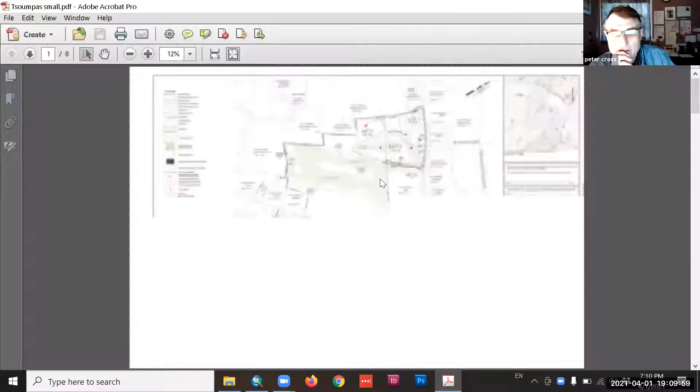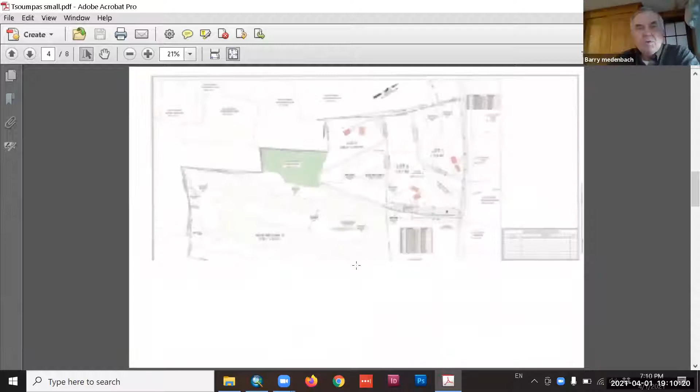Right. Okay. One more down, I think it was one up or down that was better. No, I guess it's up then. Okay, go up one more. I think it's sheet 2. Yeah, okay, that's not the one I'm looking at. Go one more sheet. Yeah, there's another sheet. Keep jumping over it, go back. There you go. Zoom in on that. Okay.

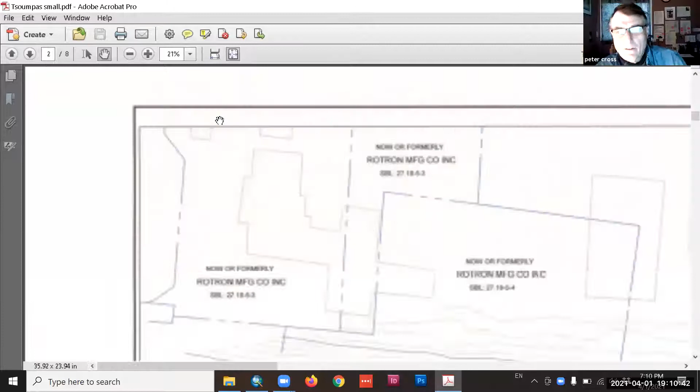I'm going to zoom out a bit so we can get a look at lot 1 and 2. Getting close, okay, getting close.

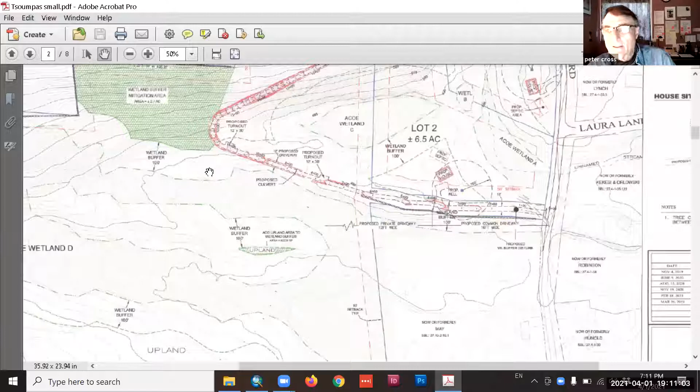So tonight's mission is that the planning board has to agree on the mitigation measure that we will apply to the site plan. The applicant has shown, off to the left, the green area, which was their idea of their mitigation plan, along the side of the steep slopes there.

What I'm suggesting is, if you look between lot 1 and lot 2, through lot 1 there's an intermittent stream that comes through. And if you look right where it says lot 2, plus or minus 6.5 acres, that area is between the two buffers. There's an area between those two buffers that also adjoins the stream, which is shown as a dotted black line.

What I'm proposing to the board is that since we have 2 lots with a stream and wetlands, I think we should give more buffer in that area, because that's more likely to get disturbed. I understand the applicant picked the other area, but I just don't think that area would ever really be disturbed.

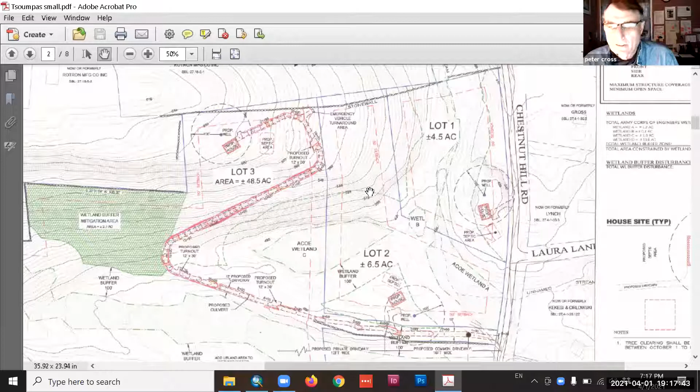It's a little hard to see what the stream is. Is this it? The stream's dotted, it's a dotted black line. Yeah, it kind of makes a loop. No, it's near that loop, but if you go to the top of the page you'll see where it says stream - it comes down a little further. Oh, I see it moving now. Okay, there it is. Now keep going, there you go, now make a turn toward the road.

So I'm thinking if we could protect that area more, because that's what the proposed wetlands and buffer is for. Except I don't think it needs protecting over there as much.

You mean on this side? It's sloped enough that it's really not going to need it. Well, but as Barry said, it would take both sides to get to the acreage, to get to the area needed. So you'd have to do it on both sides.

I mean, us adding buffer doesn't have to be exactly all in the same place, you can break it up. And what Barry's suggesting, I think, is good - to get it between Chestnut Hill and the existing wetland, and then on the house side.

Now is here, right? So what is the house site? Because the stream is right behind it. Right, and that dotted green line is the buffer.

So you've got some land here you could put a barn or something on. And that's about all there is, right? Or is this buffer here? That's out of the buffer, and I'm suggesting we create a buffer in there.

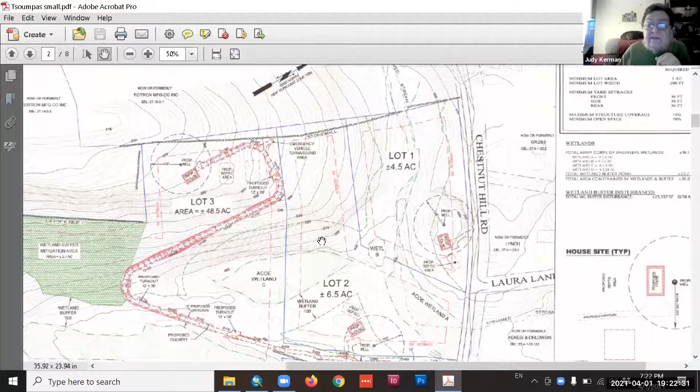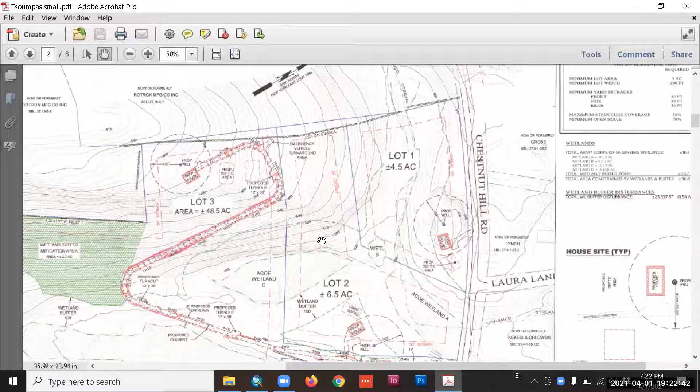Peter, can I ask one other question? In your view, would that be as much protection as we could reasonably add on? Well, the code says to at least match the square footage that's being disturbed, and that's what we're doing. And you have to keep in mind that the applicant has agreed to basically protect half, or almost more than half, of the entire property from further development.

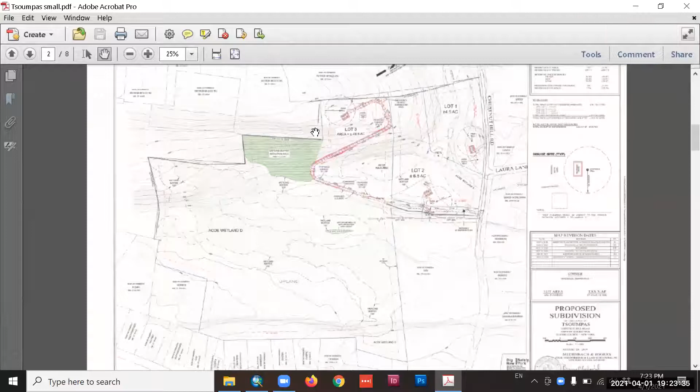So, like I said, this application is in two stages. We've already come to the conclusion that we're not going to develop the whole lower half, and that was a major concession by the applicant and a major good thing for the environment. All this stuff down here, isn't it? Right, all that's going to be left undeveloped forever.

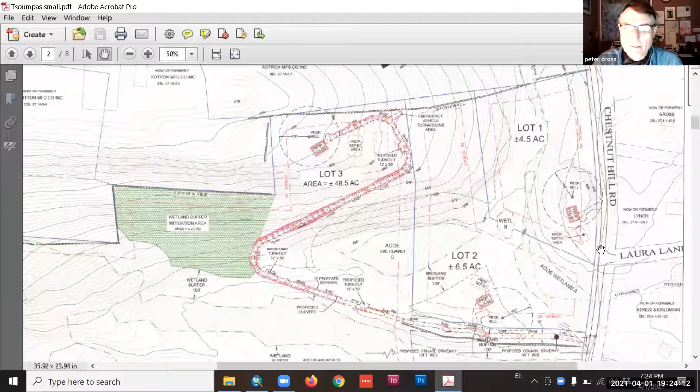So I think the idea of this, this is basically a special use permit, and the idea of doing this is to protect the environment, but also to come to an agreement with the applicant, because we're not saying no, we're saying can we do this? That's the way these things get worked out, a back and forth agreement so everybody can get the best possible results.

So I think that if Barry says there's a half-acre disturbance, remember this disturbance is actually on an existing road, so it's not really heavy disturbance. Yes, they have to put a proper road surface, but it's already a raised roadway.

So it's less disturbance than if you were actually going to put a roadway through a buffer that didn't have a road on it. I know we discussed adding vegetation, I know Matt was talking about adding vegetation on either side of the road, but Barry's point is true that you just make more of a mess on either side of that road trying to do that. So when they develop that road, if they do it as carefully as possible, then our best result is to get more protected area between the three houses. I think that's the best result we could ask for.

So basically, we would agree to that. We would vote to accept this plan as a mitigation plan, and then Melissa can put that in the final resolution. It'll be pending Barry's final map showing that. We'd have to approve them, it'd be subject to his submitting a map that's acceptable to the board. Subject to that, but I'd like to get this part closed tonight so that we can agree that this is the mitigation and we've fulfilled the wetlands and watercourse permit process.

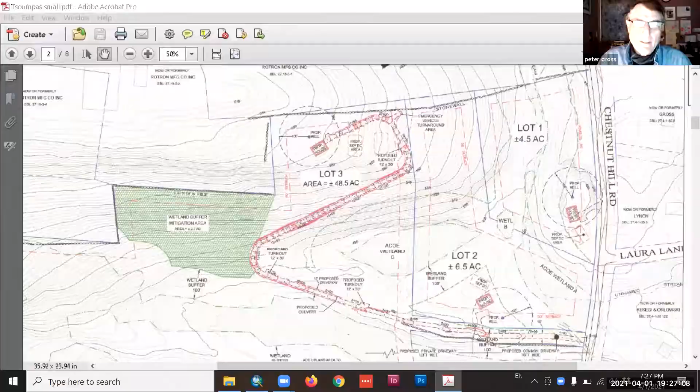And I believe we have language that says that the rest of that land will not be developed. And I believe that's also to be in the final version of the map. Right, so what's proposed now is all that can be done on that property.

So, Barry, do you have any other questions or things that you need to address? No, I just want to point out we haven't had a public hearing yet. No, we've got to schedule that, now that we've taken care of the wetland issue. So now Melissa can schedule a public hearing for final approvals.

Unless anybody on the board has any other things they think we haven't addressed. I just want to express my appreciation to Michael Tsoumpas for working with us on this and leaving so much of that land undisturbed. I think that's a very good outcome.

Yes, I definitely agree. Peter, I have a question - this is Stuart. Is a public hearing required on a wetland watercourse permit application, or only on the subdivision? So there's no... Both hearings are required? Both, we're doing them both, at the same time. Yes.

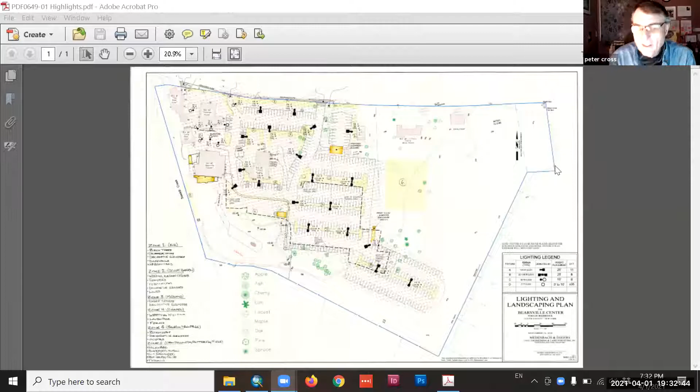Okay, so Barry, why don't you explain - whoops, it disappeared - why don't you explain what's going on here? Well, the applicant actually provided this. I'm looking at it really just like you guys are, and I'm wondering if Kim or Lizzie wants to talk about the reason they added - they're basically adding trees. Hi, the different zones.

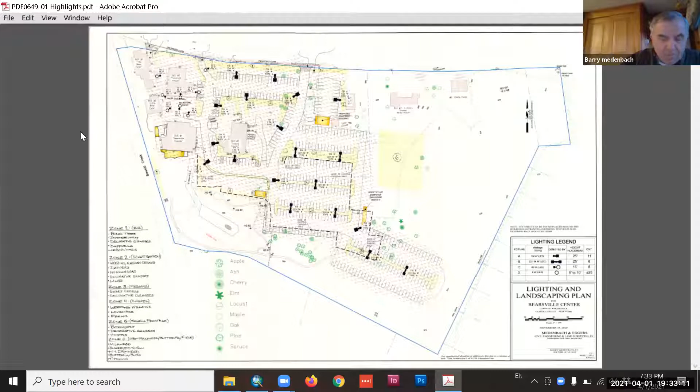Okay, well just a second before you do that, Liz - let me cover a couple points regarding this. One is the grave site for Albert and the right-of-way, which you have shown on the map, which is going to be protected and honored, correct? Absolutely, yes. The other issue was drainage, stormwater drainage from the parking lots.

Engineering wise, that water is going into dry wells, I assume. Yeah, we're going to have some recharge basins. When you get just beyond the new parking lot area, there's some depressions in the ground, probably from old stream washouts, where the water is quite gravelly and coarse, and we're probably going to recharge a lot of it back in there.

We still have to put that formal plan together because our disturbance is over an acre. We have to do this in accordance with the state stormwater regulations and prepare a full stormwater pollution prevention plan. We've looked at that, we have kind of a concept as to how we're going to do it, but haven't produced the formal plan yet. I really wanted feedback from the planning board on how we're laying out the parking lot, the number of spaces, and other features before we did all those calculations, because they're quite tedious, and if we start moving things around I'd have to do them over.

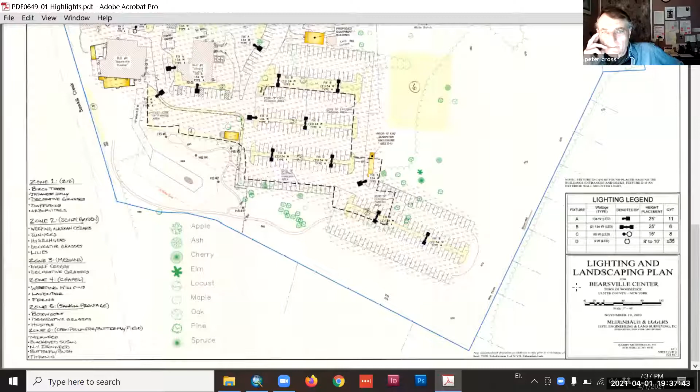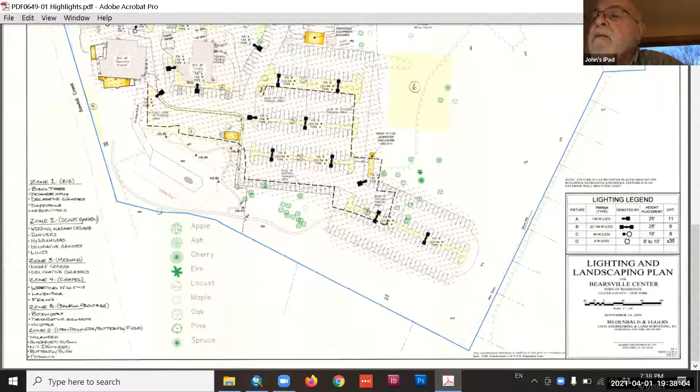Yeah, are there any elevations on here? Not on this sheet, but the other sheets there are. Would you like to see them, John? I think Barry's got some sheets that would show that. Have to figure out how to get them.

If you go to sheet 1, that shows the parking lot. But this plan here was really to illustrate the plantings they want to put in.

If you go to sheet 1, I've got to figure out what I did wrong with this control. Let me see if I can get my controls back here. Can I just say that it's highest in the top left corner and lowest in the bottom right corner?

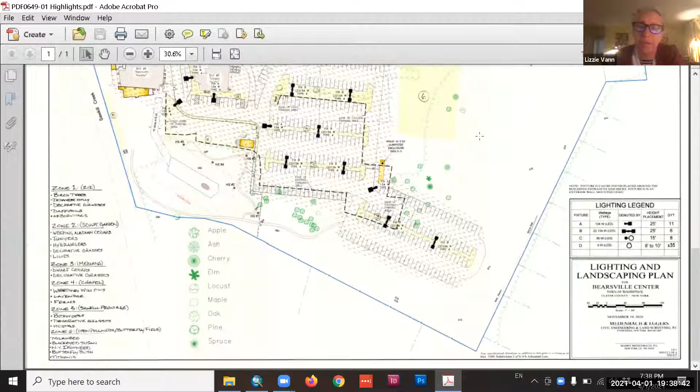The difference in height is about 25 feet from one end of the lot to the other. So we've had a lot of runoff coming off the mountains, coming off the road, hitting the buildings in the top left, and then washing down. We've trenched around every building and tried to trench in front of the Peterson house to control this water.

We actually have a proper elevation map that looks at every 6 inches, but you don't have it, so I'd have to dig that out. They have, but Lizzie, they have.

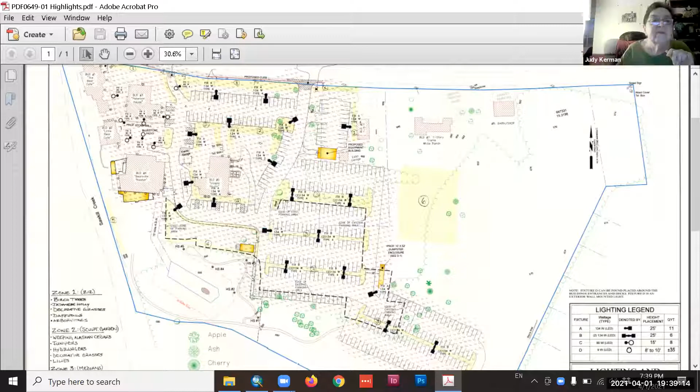If they go to sheet 1, it shows contours. Okay, I'm going to have to do something different here because this is showing me that there's just one page in that. So that was the most recent submission. You have to go back to the prior submission. This was just added as a landscape plan. We had submitted the maps earlier.

Do you know what the name of that document is? Melissa, do you know what the name of the document is? No. Well, maybe I have it and I can do a screen share, but somebody needs to help me do it. Get out of the way here. Okay, thanks Lizzie, you're the best.

We're trying. Okay, so at the bottom of the screen, yeah, it says share screen, and you got it, girlfriend. Right, okay, so that's sheet 1. I would say, blow that up a little if you can. So then up at the top of the screen, you can see a zoom button. You want to make that higher. We can do that for ourselves too. View options, okay, all righty.

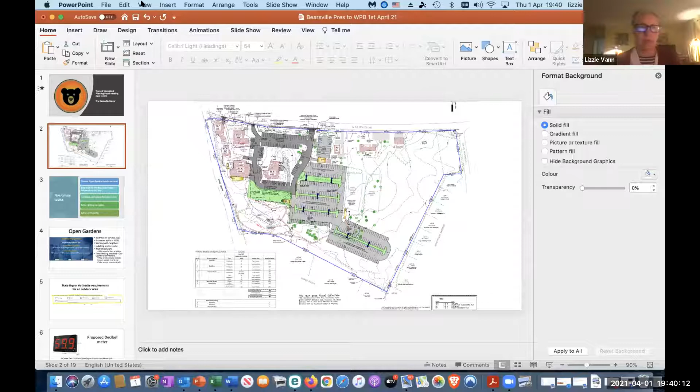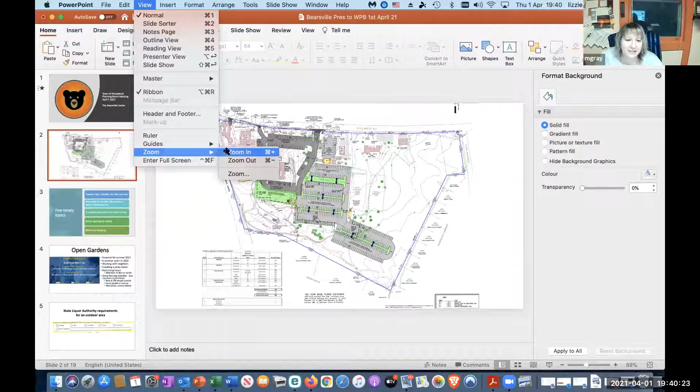Let's try this, zooming in. Okay, oops. Oh God, okay, you're doing fine. You're doing great. It doesn't want to get any bigger. I'm really sorry. Oh, there we go. There, yeah, you're doing it. Okay, now you can see those circular, semicircular contours coming left to right and top to bottom.

All right John, does that help? Down toward the stream? Yeah, everything flows down towards the stream. It flows from the top left corner to the bottom right corner. Well, actually the Sawkill Creek is on the left. Yeah it is, but it's still lower as you go down off the site there. Yes.

Okay, board members, questions about the plan? Now the parking lots are gravel? The dark gray is blacktop and the light gray is gravel.

Okay, and we're going to take some existing parking lot out. If I could talk you through the plan a little bit. Sure. So just looking at the image that's there now, if you go over to the Utopia building, which is the one whole building you see there with the parking all around it, that's going to be paved all the way around. The lower end of that big green area, that's actually gravel parking now, and we're going to turn that into a lawn area, so they have a nicer outside lawn area that's closer to the buildings.

And we're adding some additional parking up. If you look at the main entrance, could you slide up the sheet a little bit to the highway? Okay, yeah, over and then just up. Yeah, there you go, right there.

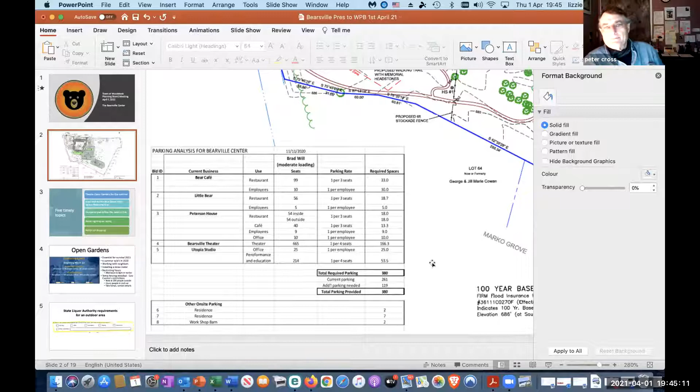So does any member of the board have questions regarding the parking in general? I don't know if you normally put handicap spaces on those charts. I know you've got them. Yeah, we do, yes we have, and they're right at the top near the buildings. I just wonder if they should be on the chart. I think we state at the very bottom of the chart how much we need. But I think they are, Judy.

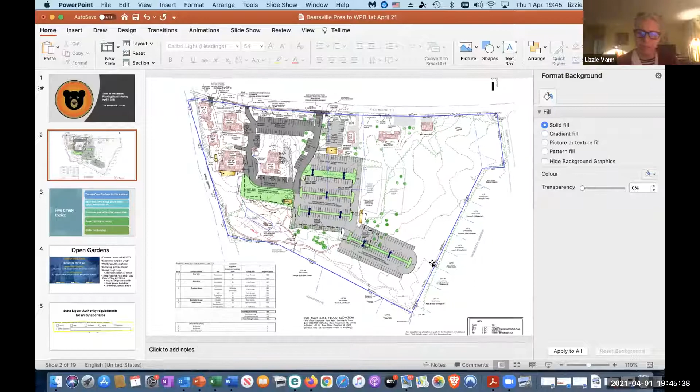I'm just zeroing in on it. Okay, you see the areas with the dots just here? There's a total of 16 ADA spaces required based on the total number of spaces. You see the areas with the shading next to them? Oh yeah, I know exactly what I'm looking at. That's basically van parking. If you can get the locals to keep from going in the shaded areas.

Well, we will put up signs and we will police it. Which brings up another point, Barry, do you have a sheet of all your signage that you're going to have? There is a sheet, I might have to pass back to Melissa or Judy, because there is sheet 3 on the site plan review submission, it has the signage on it.

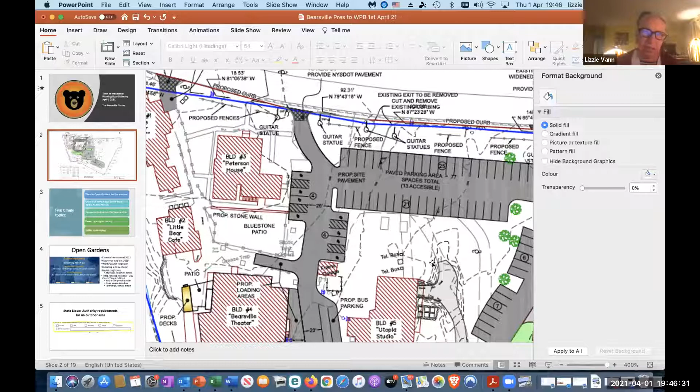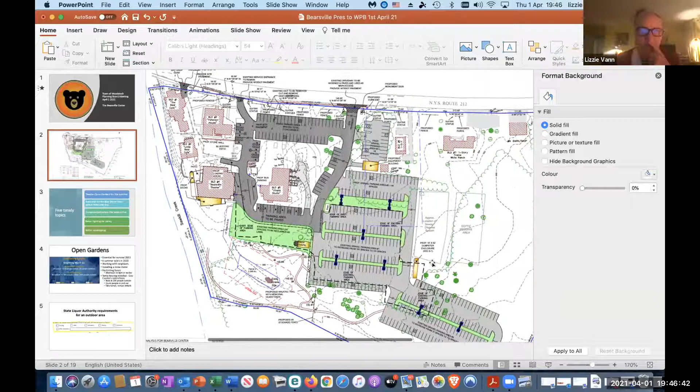Okay, because in the resolution we need to know all the signage. Well, this is a sketch plan, isn't it? Yes, I think that's what it's called. So you're basically ahead of the game as far as what you already got. I'm just going to try and open it, excuse me a minute.

Yeah, if you could get sheet 3 up there, it does show all the signage. So you have one way signs, whatever signs are going to be on the site, and of course the sign on the road for your place has to meet the town sign specs. I'm really sorry, I have to find an email from my colleague.

She sent it to me today, I'm just doing that now. Oh my goodness, are you seeing my screen? I've got all sorts of... okay. Quotes, weddings, oh Lord. Tavern.

Oh here we go, site plan. Right, okay, so I'm going to open this up and go to sheet 3, I think it is, Barry. Okay, yes, there. So can you see that, or do I need to do that little thing again? Can you see it? Okay, it has your main signs, but I mean, signs that say one way, or are you going to have directional signs for parking?

We don't show that yet, but we can. The board wants us to detail that. We certainly can. We generally like to have a map of all the signs that are going to be there. So it's a traffic control sign? Right, exactly, yeah, we can do that.

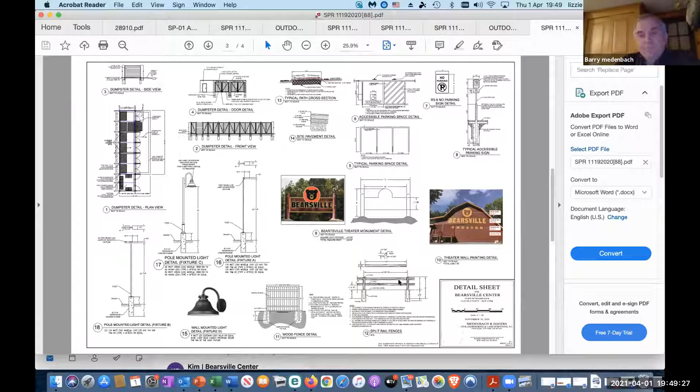Now, you mentioned stormwater coming down the hills and something about ditches, and I'm wondering, Barry, whether rain gardens are going to do the job for you. Yeah, we're going to size them for that. Probably some, not so much just rain gardens, but water quality basins, like a big basin area that can handle a lot of water before it soaks into the ground.

But what Liz did is she put a lot of sub drainage in around the buildings, around the footings, and they picked up all of the leaders from the roofs and piped it all the way down to the back of the site. That was a major improvement over what was there, because prior to that there was nothing. Water would come right off of the highway, off of the buildings, and just lay there around the buildings and create big mud holes.

So she's got a pretty good handle on the improvements she made over the past year around all the buildings. We spent $250,000 on something I never heard of before called mold remediation, because the water went in the basement and everything was a terrible mess. That will no longer happen, the mold will no longer appear. So what I'll be doing is taking it the next step and handle all the drainage from the whole parking area, and show that it complies with today's standards for stormwater pollution prevention.

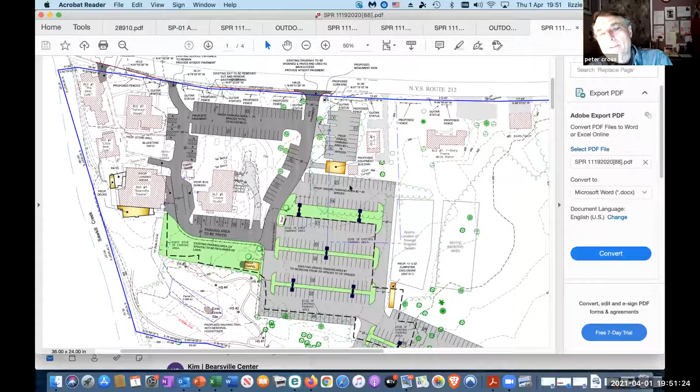Okay, and the other thing we need is either cut sheets for all your lighting, which of course has to be dark sky compliant. Yeah, we did that already. Do you have lighting for the parking areas? Yes, you can see them right on this sheet. Well, there you go, there's the photometrics. We did a total photometric plan for the whole parking lot and even around the buildings.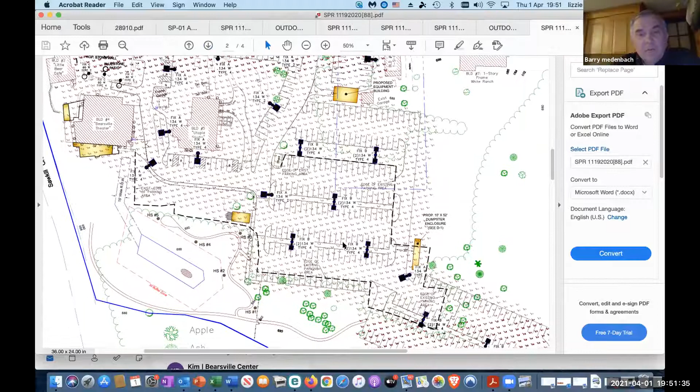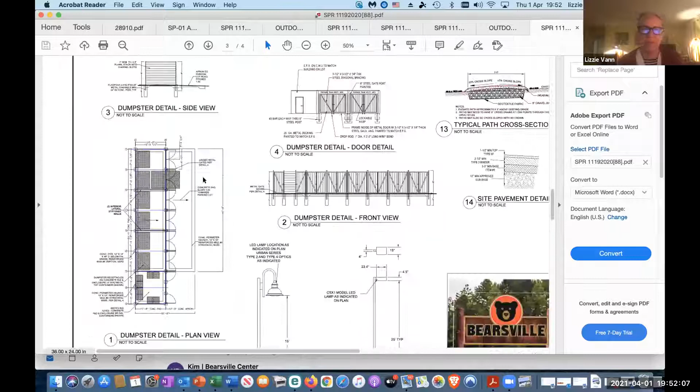And there's a nice detail, so all the old lighting is going to get pulled out and it's going to get all new lighting. If you go to that detail sheet we had up before, you can see there's the lamp fixture right there, that one's on the building. The higher flat ones will be in the parking area, and the ones with the gooseneck are closer around the buildings. So hang on, I'll make it a bit bigger. And the photometrics, well, here we go.

So they won't spread out onto the highway, correct? No, you can see that right on the plan. That's why we do the photometrics, to show we're not spreading any light off site. Okay.

Board members, other questions regarding site plan?

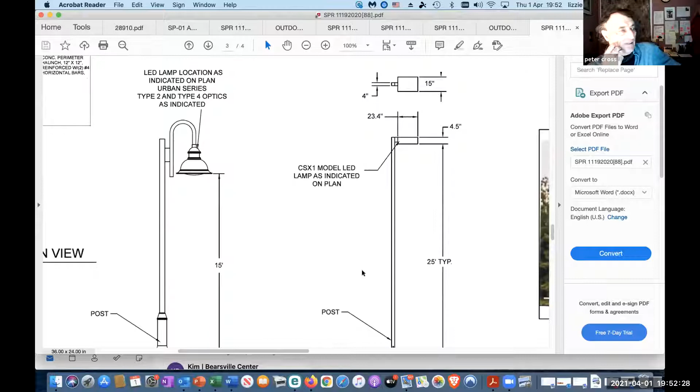Color me impressed. Now, one thing we need is a couple of volunteers to do a site visit. And according to the new law, we can have as many as you want go. Really? Well, it's not a new law, it's the old law, I just never read that you can have over a quorum actually go. But we will need a couple for the site visit.

We'd love to have you. We'd love to show you. We can show you the theatre as well if you'd like to come inside. Peter, I'll volunteer.

I'll volunteer too. Get one from me, one for John. Brian will volunteer too, Brian will go. Okay, I'll go because it's down the bottom of my hill, in fact I was there yesterday. I don't know if I want to walk around outside the car, that's a little too difficult. Well, you can drive around that lot. I definitely can drive around the property, so I might just come and drive around.

So John, or anybody, think of something that we haven't addressed that we need to address for a site plan?

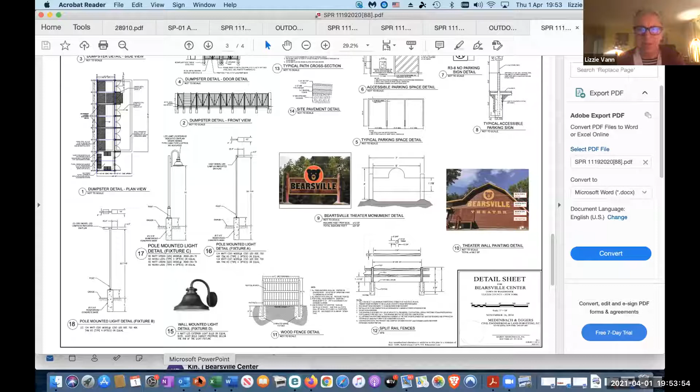Could I raise something, please? I don't know if this is the right time, so you can tell me to go away. But there are a few issues that we would like to raise with you earlier now in the process, because it's spring. I have a little presentation, hang on, I have to put it on the slideshow. Can you see that? Yep, yeah, okay. So that's the site plan.

There are 5 areas that we have some issues with, and they're to do with the timing. Forgive me if I get this wrong. One is that we would like to have the gardens behind the theatre open to the public for the summer, obviously complying with COVID guidelines, and I believe we have to ask for permission to do that. I will take you through each of these. We need to put a wall around the bluestone patio for the State Liquor Authority to be happy. We would like to put a dumpster pad down before the bears wake up. And we've covered a little about lighting, and we're doing something on landscaping, which I think might come up later.

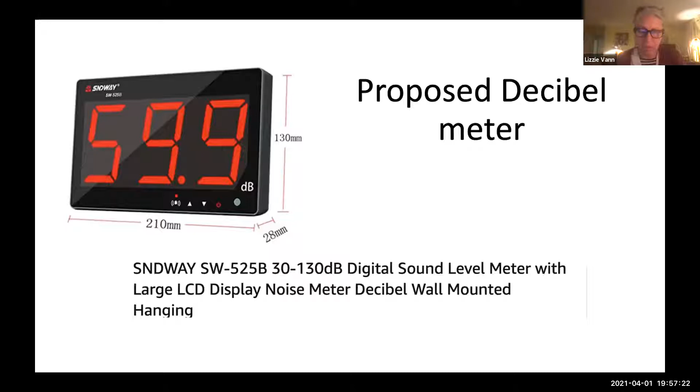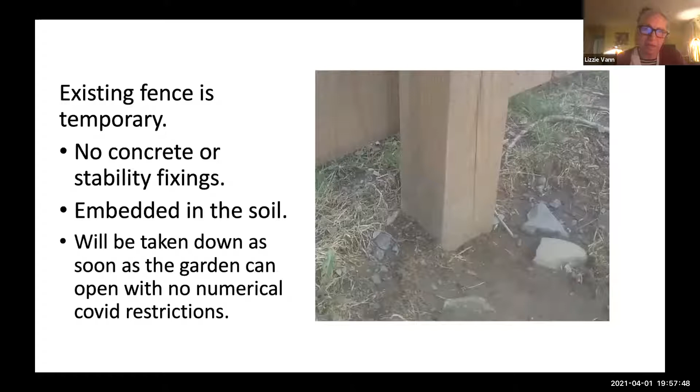This is a fence post to show how temporary it is. Normally a fence post would go into a metal jacket and be in the ground with concrete in it. We haven't got concrete, we haven't got the metal jacket. As soon as Governor Cuomo says there are no numerical COVID restrictions, I really want to take this fence down, so that's a key thing for us. And this, for those who haven't seen it, is what we did last summer - we had some people in the gardens on Saturdays and Sundays. So that was topic one.

Liz, just two things that come to mind - your first question was timing. Yes.

Technically, no work can be done on a site while it's under site plan review. So the fastest we get this approved, the fastest you can do things. Yes, because technically, no work should be done on a site that's under site plan review until it's been approved.

That fence we're looking at in that picture is going right through the right-of-way easement, which is technically a violation. And if I could just explain what happened with that, that was totally unintentional.

We tried to get a surveyor before we knew we had to put the fence up because of the coronavirus. We tried to get a surveyor to come out in May last year, and I think even in June, as we were planning for it, and nobody would come. So we got the plan out that you've seen, and we measured it all out ourselves, and we left lots of space on the other side of the fence for access to the grave.

And we thought that we'd done it because there's a well marked on the plan, and we stayed to... anyway, I guess when Sally brought the surveyors out, we had unintentionally gone over her right of way. So of course we would take it down. She had access obviously on the other side.

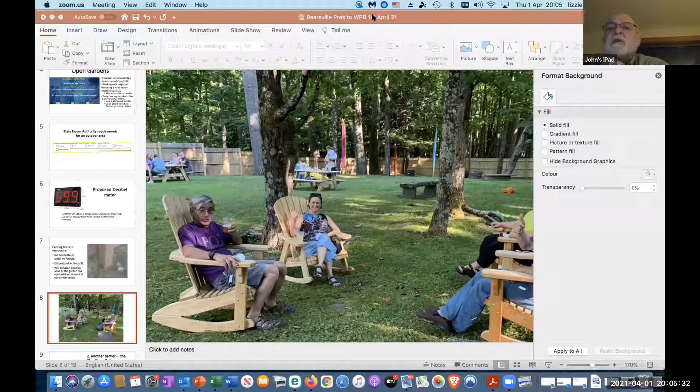Okay, so unfinished business. I still have a screen. I can see you guys. Yeah, Lizzie, you can leave the meeting and it might go away. Okay, I think it happened. Okay, bye, bye Lizzie, thank you.

Good night. Stuart, if you're there, if you'd be so kind as to make a motion to adopt the draft addendum to the resolution for the Mountain Meadow Realty. Remember, this is an addendum. We already had it done, but they changed the outside of that one building.

Something's not right here. Can you hear me now? There you go, I was muted. I apologize.

Okay, so I make a motion to, SPR number 18-0364A Mountain Meadow Realty, to adopt the draft addendum that's pending to a resolution for Mountain Meadow Realty. So moved. All in favor? Aye. All right, was that Brian who seconded? Yeah.

Thank you. Okay, now we need a motion to approve the credits for Judith for attending the Critical Environmental Areas webinar on the 23rd, and for Brian for attending the New York Planning Federation Communication, Media, and Social Media on March 24th.